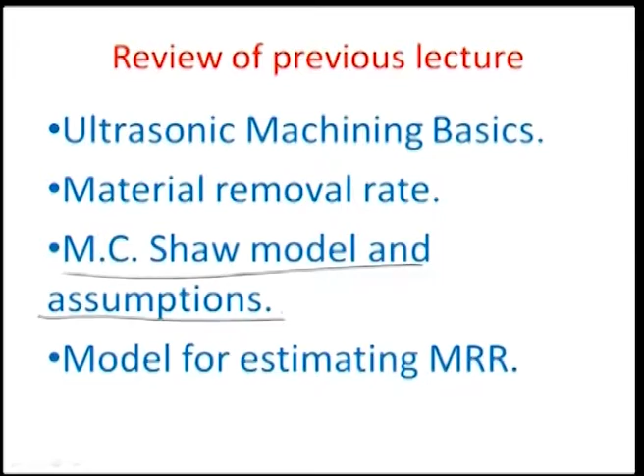For all practical purposes we should consider the amplitude of motion of the tool head to be constant, and so forth. So there was a set of assumptions we made for predicting the MRR, or material removal rate, and then we started modeling to estimate what this MRR value would be.

In the process of doing that, we arrived at a formulation given in this slide, where we talked about the ultimate yield stress of the workpiece material, sigma W, and correlated this to the average force that the vibrating tool head gives on the grains, the amplitude of motion of the tool A, and the number of grains or particles making impact per cycle, Z. D here was the grain diameter of the abrasive grains.

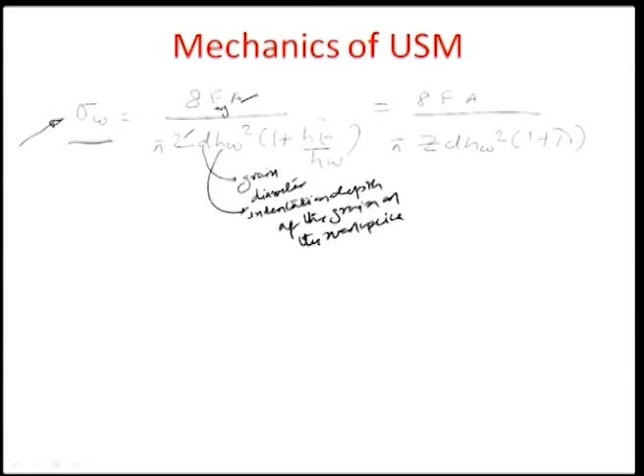HW was the indentation depth of the grain on the workpiece, and this parameter known as lambda was basically the ratio of the ultimate flow stresses of the workpiece and the tool. As we have seen before in detail, the ultimate yield stress is inversely proportional to the indentation depth. So we can assume that sigma W by sigma T, the ultimate yield stress of workpiece to tool, is nothing but the inverse ratio of the depth of indentation of the tool to the workpiece, and this we considered as lambda, which comes into this equation.

Therefore we have ways and means to predict the ultimate yield or flow stress of the workpiece material. So that is how we have a well defined relation between the various parameters associated with the force given by the vibrating tool head to the area of the grain interfacing with the surface, and the ultimate flow stress of the work material sigma W in question.

Now if we try to see what the Z value is, the grains per impact, the number of grains in contact between the workpiece and the tool in one impact, let us assume that the number of grains acting is inversely proportional to the square of diameter of each grain, which is obvious because supposing there is an area with many grains on it, and the average diameter of each grain is given by D as predicted before.

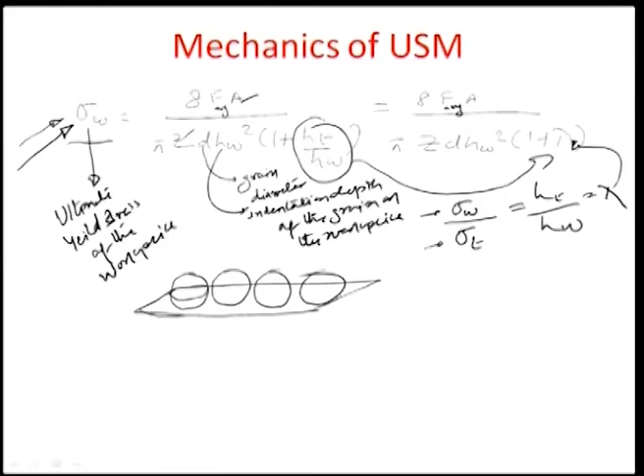So this diameter here is D. The amount of occupation of the grain area would definitely be a function of the overall area coming between the tool and the workpiece. This is the tool, the vibrating tool head, coming down, and the grains are in between the tool and the workpiece. So the influence of the diameter of the grain on the effective area of the workpiece that can be machined, shown by this shaded region, is obvious.

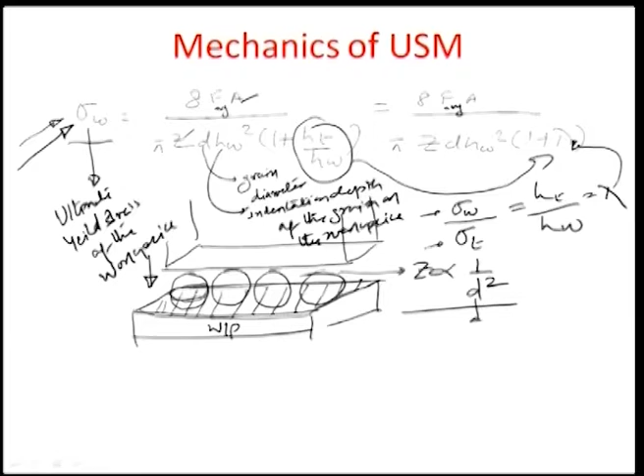So if we assume that the number of grains acting, let us say Z numbers, in one impact between the tool and the workpiece is inversely proportional to the square of the diameter of these grains, which signifies the area of projection of one grain, it will not be improper to assume this kind of relationship.

So, for a given area of the tool face, Z is actually inversely proportional to the square of the grain diameter, and also Z would be proportional to the concentration of the grains in the slurry. So, if C is the concentration term, more is the concentration, more would be the value of Z, the number of particles between the tool and the workpiece.

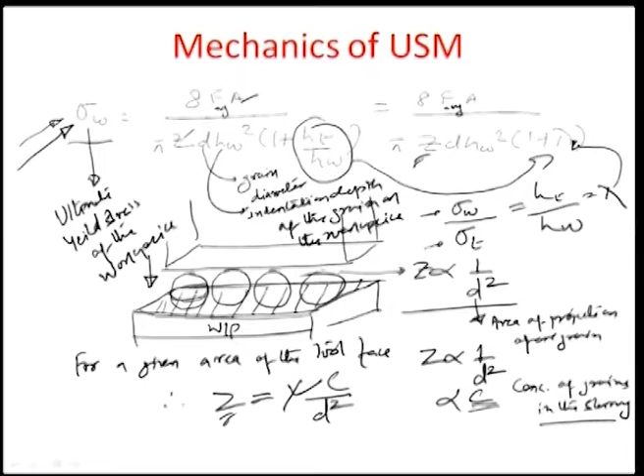So, therefore, we can say that Z is equal to some constant xi times C by d square, and we can substitute the value of Z from here into this equation. So, the final form of the equation comes out to be: square of HW is equal to 8 times average force times amplitude A times grain diameter, divided by pi times xi.

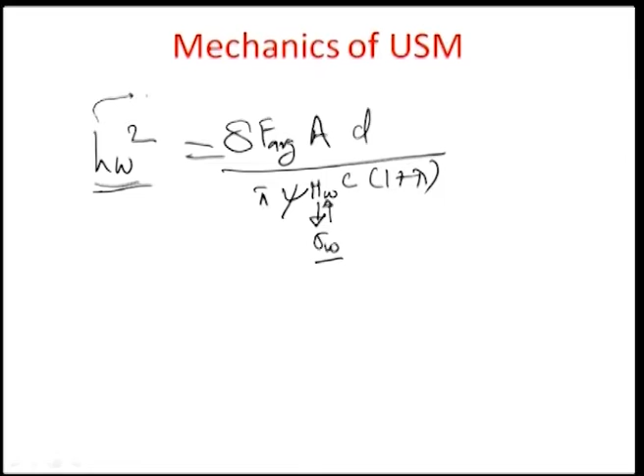And the flow stress of the material is nothing but the hardness of the material. So, sigma W and HW are kind of interconvertible. So, HW times C times 1 plus lambda, okay. And where this small HW, as you know, is the depth of indentation of the grain on the workpiece surface.

So, therefore, HW always becomes equal to the square root of 8 F average A d divided by pi xi HW C times 1 plus lambda, and if we substitute this value of HW in the equation for Q - you remember Q earlier was determined to be proportional to d, HW to the power of 3 by 2, times the value of Z times the frequency nu.

So Q here can become - of course we can substitute all these values here. So Q, finally after substitution of HW and the value of Z, which is inverse square of d times C times xi, and nu of course is the frequency, we get: Q is proportional to amplitude to the power of 3 by 4, diameter d to the power of 1 by 4, the average force of the vibrating tool head to the power of 3 by 4, times concentration to the power of 1 by 4, divided by the flow stress or hardness of the material HW to the power of 3 by 4, times nu.

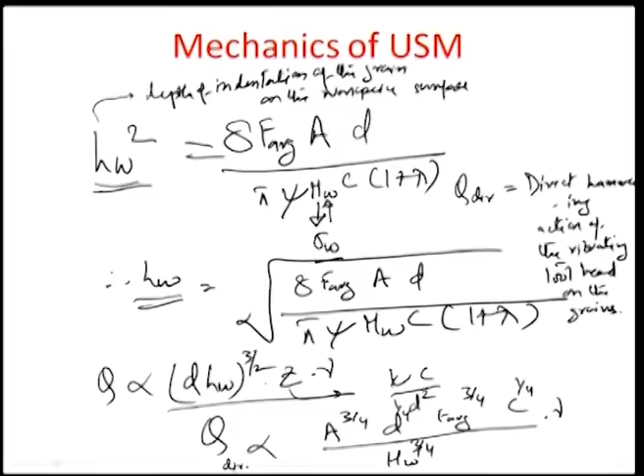As I told you, there are two modalities of this material removal. One is the direct hammering action of the vibrating tool head, and the other - which is not as significant but still needs to be considered and modeled - is the impact that a free grain would have on the surface. That means if the gap between the tool and the workpiece is very high, there is a possibility of the abrasive grain to freely flow between the tool head and the workpiece. So the impact that the tool would give on the abrasive grain would be converted into a sort of kinetic energy of the grain, and this kinetic energy would impinge on the surface, thereby removing material from the workpiece. So that is a separate mechanism.

So this Q that we have determined now is really the direct hammering action, where you are squeezing the grain between the tool head and the workpiece, giving an average force F average between the grain and the tool, which is creating a direct ploughing action. So that is what the first part is.

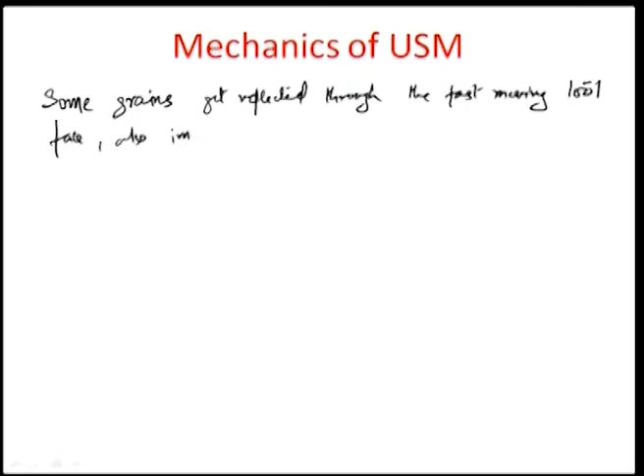Let us now look at the second part of the problem, related to the kinetic energy of the grains. Let us try to model that part. So some grains get reflected through the fast moving tool face, and also impinge on the workpiece.

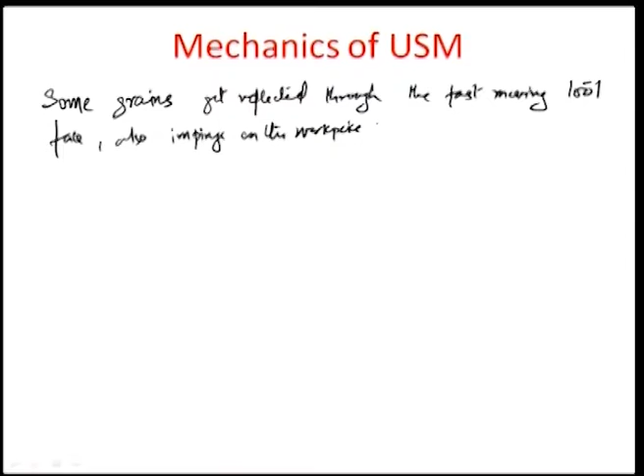So we can estimate the depth of indentation in that case by looking at the following. Let us say this is the tool, and this right here is a workpiece, and there is an abrasive grain, which because of the motion imparted by the slurry goes and strikes the tool in this particular direction, coming out of it in this direction, and we will have to somehow predict what is the maximum reflected velocity.

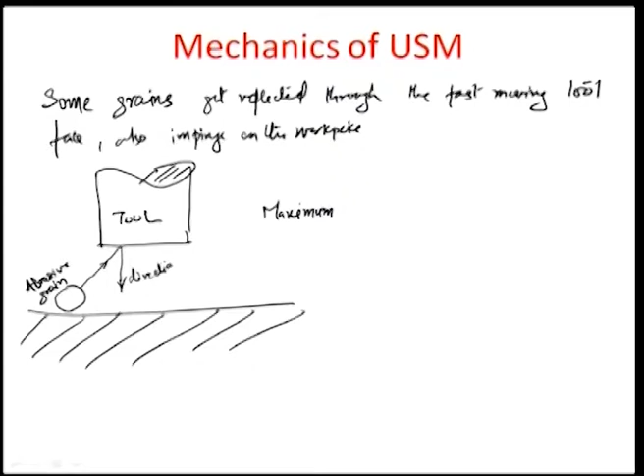So, this is the direction of reflection of the grain. So, the maximum reflected velocity needs to be somehow determined in this particular case.

Okay, so that is actually, let us say, y dot maximum. So, as we know, the grain velocity of the abrasive grain, the initial velocity by which it is striking the tool, is of hardly any significance in comparison to the overall inertial component of the tool, because the tool first of all is very heavy, and number two, it is also vibrating at a certain velocity.

At ultrasonic frequency, meaning thereby that its velocity is also very high. So, therefore, the initial velocity of the abrasive grain as it strikes the tool surface, for example in this position A here, is not really of great significance, and we can say that whatever is the velocity of the tool head

is at that particular point of collision, at the time of collision, would be equal to the velocity of reflection of the particle. Okay, so it is simply imparted, there is no specific inertial component associated with the abrasive grain because of its small nature. It is few microns, as I told you, abrasive grains could be in the range of 20 to 25 microns.

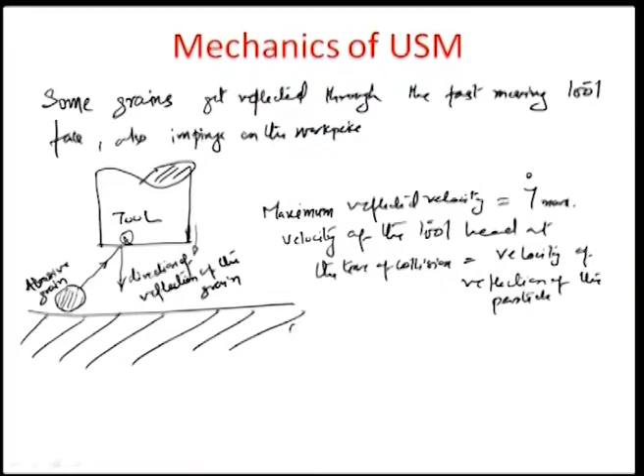So, let us find out first the operating velocity of the tool head as a function of time. So, y(t), as you know, because it is a sort of simple harmonic motion imparted by the tool.

So, y(t) can be written in the form of an equation as the amplitude of motion, a, times sine of 2 pi nu t. Okay, nu is the operating frequency of the tool, and a is the amplitude, and so that is what the equation of motion of the tool head would be.

So, the operating velocity of the tool head would be dependent on this equation of motion, and so operating velocity can be written down as y dot t, the first differential of y with respect to time, which is equal to a times 2 pi nu times cosine of 2 pi nu t.

And as you know, at time t equal to 0, which signifies probably the mean position of the tool, the velocity is supposed to be the maximum. So this value y dot t would be y dot maximum, which is actually equal to a times 2 pi nu. A is the amplitude of motion, nu is the operating frequency, and so a times 2 pi nu is basically the y dot max, or the velocity of motion.

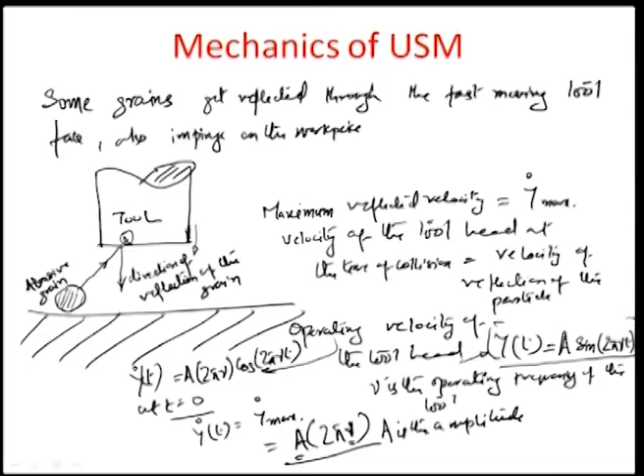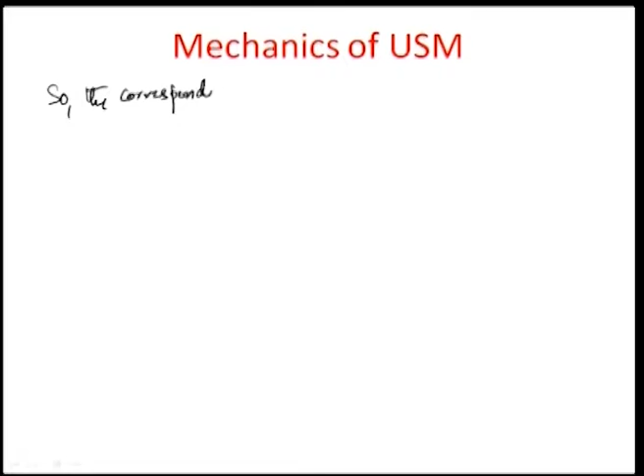So now we look into the aspect of the kinetic energy of the grain once the maximum velocity of the grain is there. So the corresponding KE, or kinetic energy,

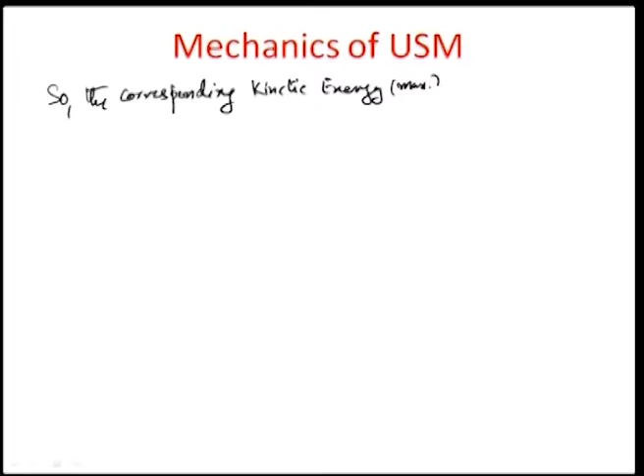actually will be equal to the maximum kinetic energy, because it is half mv square. V is the velocity of motion, and v is equal to v max, corresponding to the maximum velocity, the time when the tool is at the mean position.

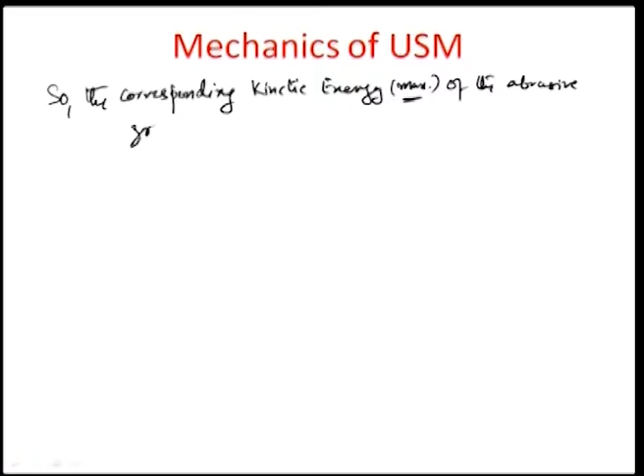So therefore, the maximum kinetic energy of the abrasive grain, I already explained to you before, is really nothing but due to the maximum velocity of the tool. The inertial component of its own self, of the grain, is so small that we do not really treat that in this equation, and so therefore the maximum kinetic energy of the abrasive grain is given by the term half mv square.

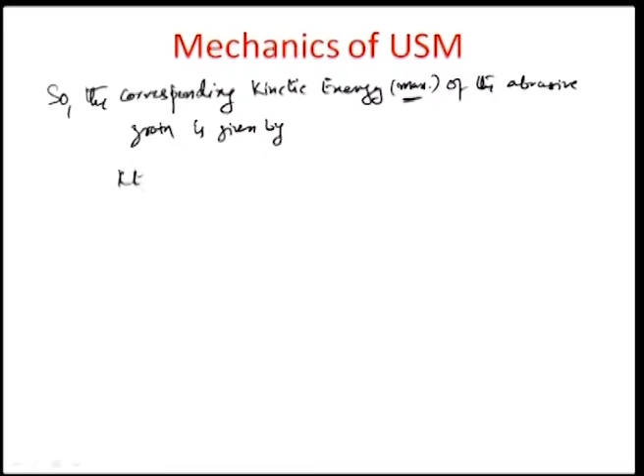And m here, because it is a spherical grain that we are assuming with diameter d, we can assume it equal to the volume of the grain, which is 4 by 3 pi r cube, or d by 2 whole cube, times the grain average density rho a. So this is actually the density of the abrasive material.

This is not really the number of grains per unit volume, but it is the density of one grain per unit volume of that material. So that basically is the mass component in the motion.

So it is half mv square, and v, as you know, is 2 pi nu a squared, where nu is basically the frequency, a is the amplitude of motion of the tool head, and this is a characteristic property of the grain itself. So if we really try to solve this around, we get the term 1 by 3, cube of pi, rho a d cube nu square a square, where rho a is the density of the abrasive grain.

So, that is what the maximum kinetic energy in this particular case would be.

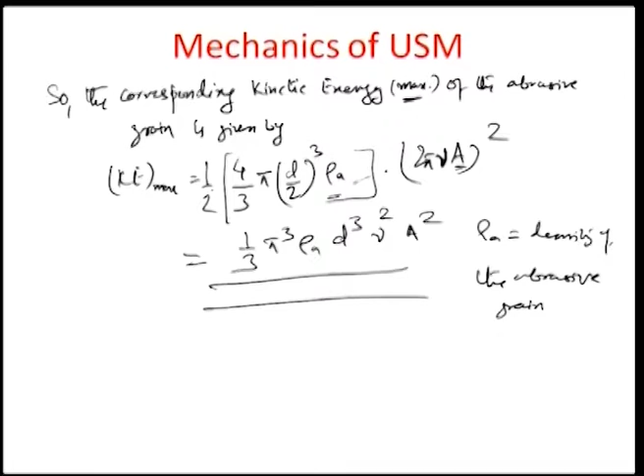Basically, now we want to find out the amount of energy which is needed for the indentation caused on the surface by a free flying abrasive grain that comes and strikes onto the tool surface and impinges onto the workpiece surface as a result of the reflected velocity.

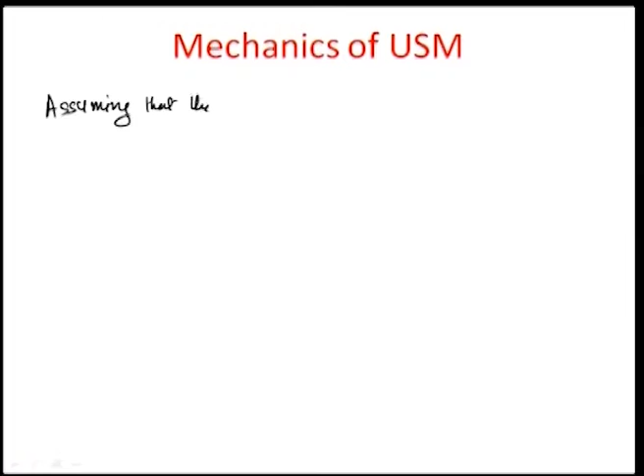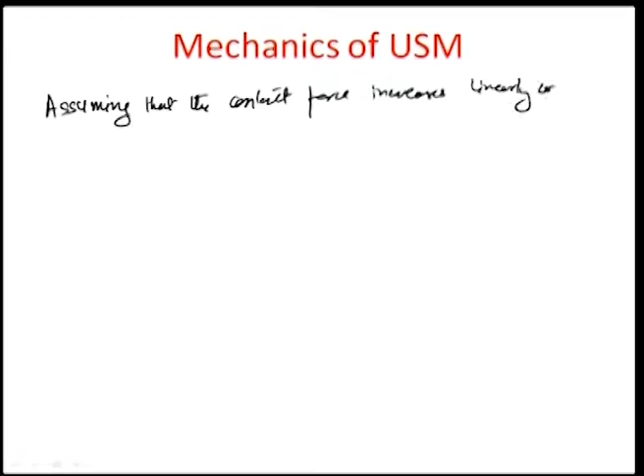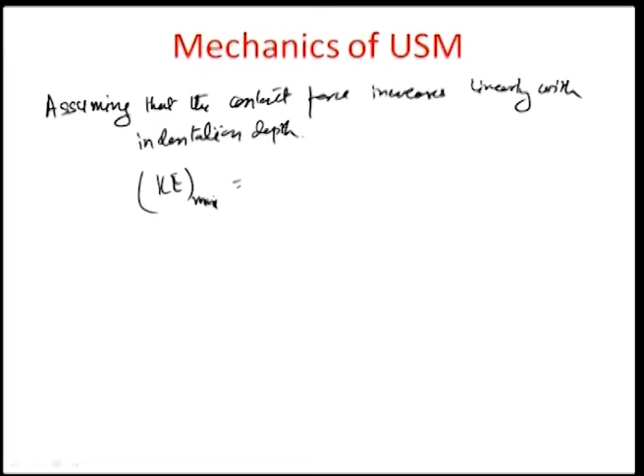Assuming that during the indentation caused by such an impinging grain, the contact force increases linearly with the indentation depth, the Ke max which has been imparted onto the grain surface, or the free flying abrasive grain, by the tool surface should really be equal to half Fi dash max Hw dash.

So this is the linearly varying model, meaning that the force is 0 at the beginning when the grain has not yet struck the surface, and then the force slowly increases because the grain gives all its momentum, all its energy, to the surface, and also faces the reverse force from the surface.

And then after a while, after the full indentation has been realized, the amount of force at that point can be treated as Fi dash maximum. Then you can assume that the grain slowly releases contact, meaning it flies off the workpiece surface and the force goes all the way back to 0.

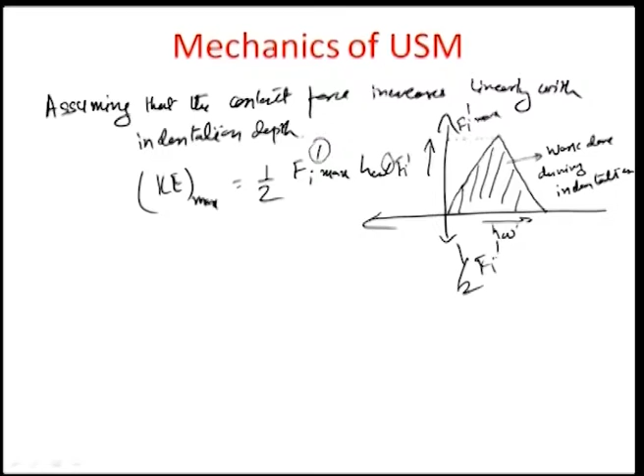So the area under this curve, shown by the shaded area, is really the work done — the amount of work done because of which the indentation has happened. During indentation, this area is given by half Fi dash maximum Hw dash, and we equate that to the maximum kinetic energy of the grain obtained earlier.

So therefore we can easily find out sigma W, which is actually equal to the hardness of the workpiece. These are all flow stresses, and it is related to the maximum force at that instant when the indentation had gone maximum — that is, Fi dash max per unit area.

At that time, if we assume that the total grain diameter projected onto the workpiece surface is capital D, and capital D is, as you already know, twice root of d Hw, where Hw is this depth of indentation — recall the first exercise on USM where we modeled how a grain with diameter d impacting a surface produces a depth Hw. There was a relationship between this capital D, the projected diameter of the grain on the surface, and the grain diameter.

So therefore, the force per unit area from this equation, where F goes to Fi dash max — the maximum force of the grain on the surface — per unit area at that time, which we assume to be pi capital D square by 4.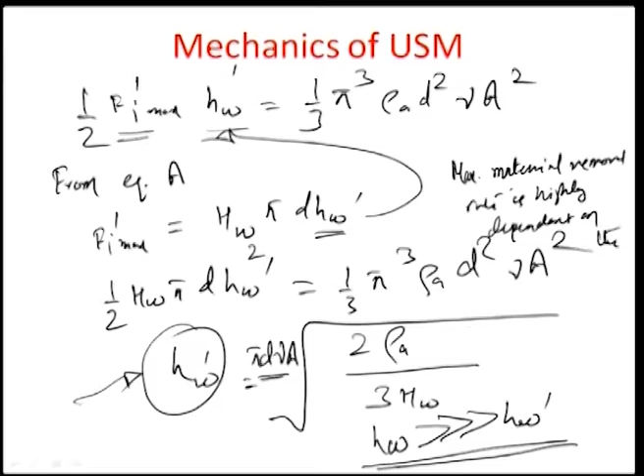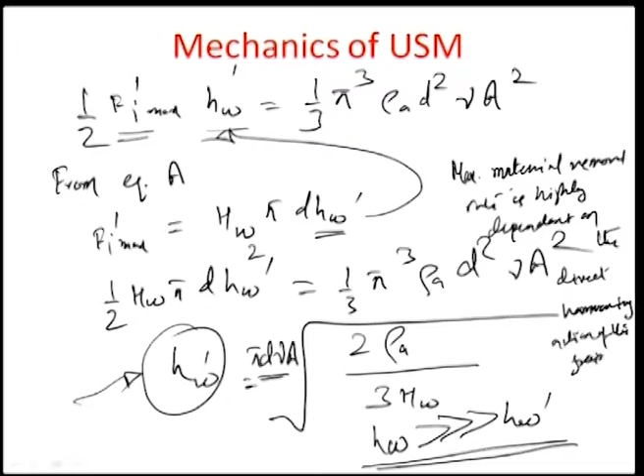So the maximum material removal rate is highly dependent on the free flowing versus the direct hammering action of the grain. It is dependent on the direct hammering action of the grain. So it can be concluded that most of the material is really removed by direct hammering, and very little material comes out because of the free flowing impact, which is not relevant to mention here.

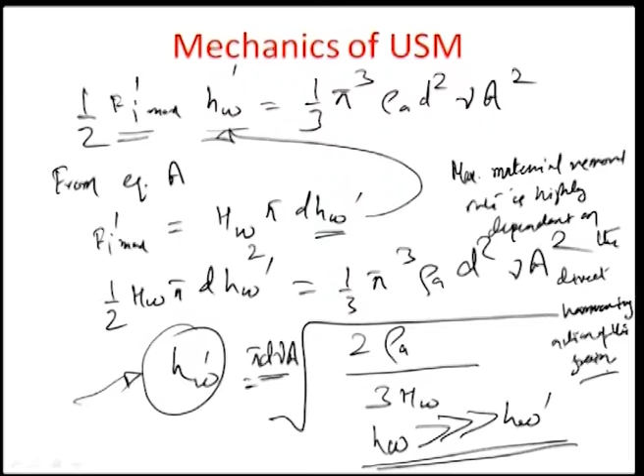From the earlier relationship we have seen that MRR is proportional to A to the power 3 by 4, grain diameter small d to the power 1 by 4, average tool force to the power 3 by 4, times concentration to the power 1 by 4, divided by hardness of the workpiece to the power 3 by 4, times nu, where nu is the operating frequency, A is the amplitude, small d is the grain diameter, and HW is the hardness of the workpiece.

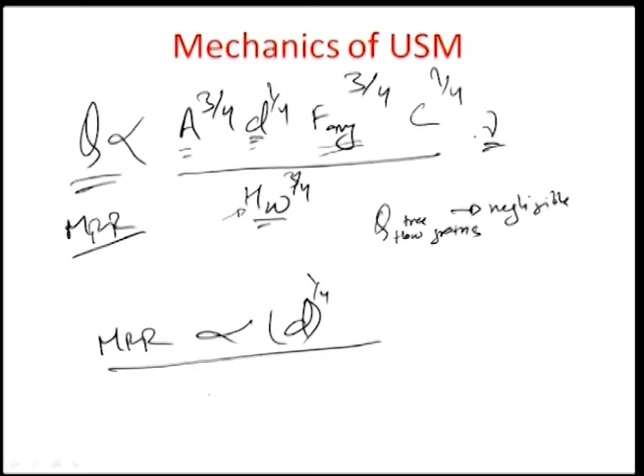As I discussed, the MRR because of free flowing grains is negligible. Therefore, this really is the MRR value, and it is safe to say that MRR is proportional to d to the power 1 by 4, where d is the grain diameter. Unfortunately, that is not so, because in experiments it has been observed that the material removal rate is proportional to the first power of d, not d to the power 1 by 4. So this was a discrepancy that arose from Shaw's model.

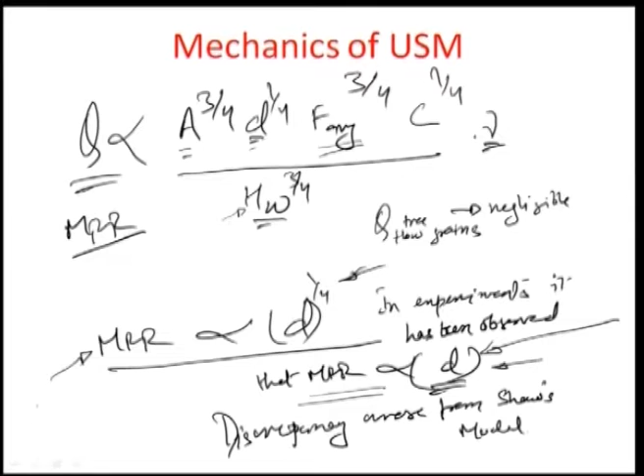Because of this, some explanation needed to be given so that this experimental data, proportional to d, could be fit into the data theoretically derived by Shaw's model. So Shaw actually tried to find out what really goes on in reality. This discrepancy was addressed by Shaw finally by looking at the overall shape of the grain.

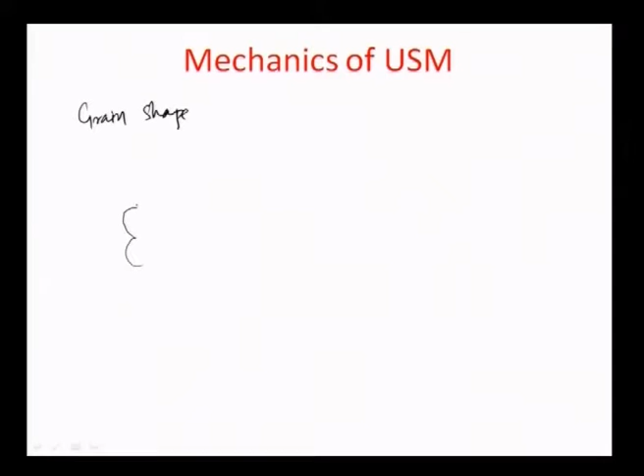Shaw looked at the grain shape under a microscope and found that the grain is not actually a spherical grain, but a sort of flowery structure on the surface, something like this. And what really was impacting the workpiece surface was not this overall average spherical grain diameter small d, as has been illustrated many times in the model, but this smaller diameter here, of one such spherule, d1. Essentially this is the diameter which would affect the material removal process and indent on the surface. The surface area also would be determined by d1, not d.

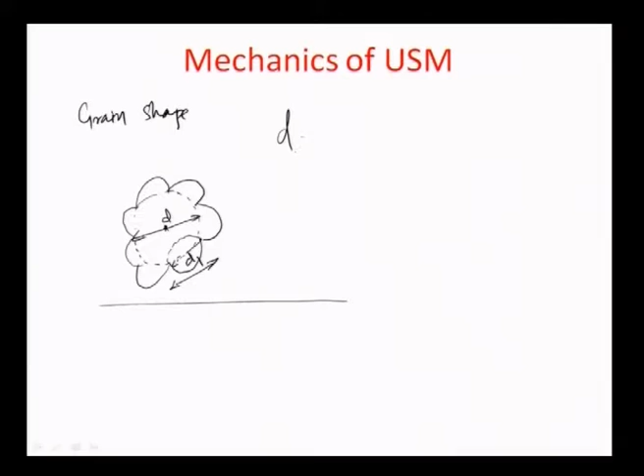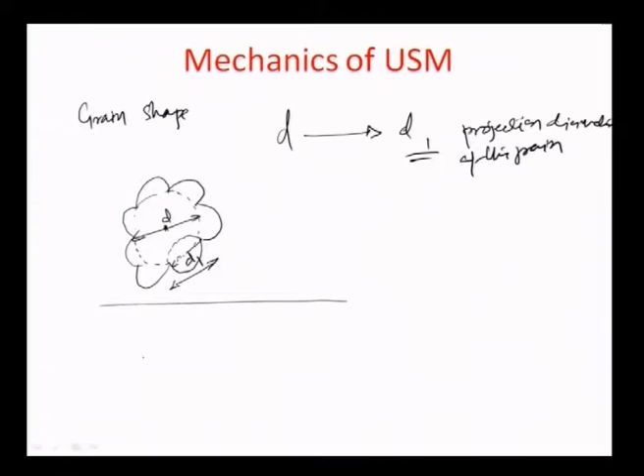So he closely monitored if there exists a correlation between the grain diameter d and this projection diameter of the grain, d1. What he interestingly found is that yes, there exists a correlation where these two can be very well correlated, as d1, the projection diameter, being proportional to the square of the average grain diameter small d — meaning that if this diameter increases, d1 almost increases as a square of this diameter.

Therefore, it is safe to assume that d1 is actually equal to a constant mu times square of d, and this mu can vary between close to 1 or somewhere less than 1, and that way you can have a very nice formulation between d1 and square of d.

So let us call this equation b in the theory of Q, and Q you already know is proportional to this, now it is d1 hw to the power of 3 by 2 times z times nu. Remember, this is the volume of material removal.

This d1 hw to the power of 3 by 2 is now indicative of the new projection grain diameter, which is actually the diameter causing the indent or impact on the surface, times the depth of indentation hw, which remains almost the same, to the power of 3 by 2.

This is correlated by the formulation square of d is actually equal to 4 times d1 hw. So we are taking the modified diameter of this projection, which is causing the indentation, and trying to find a relationship between this diameter and the overall grain diameter d. So if you put this expression d1 into this particular expression here, you get that of course hw...

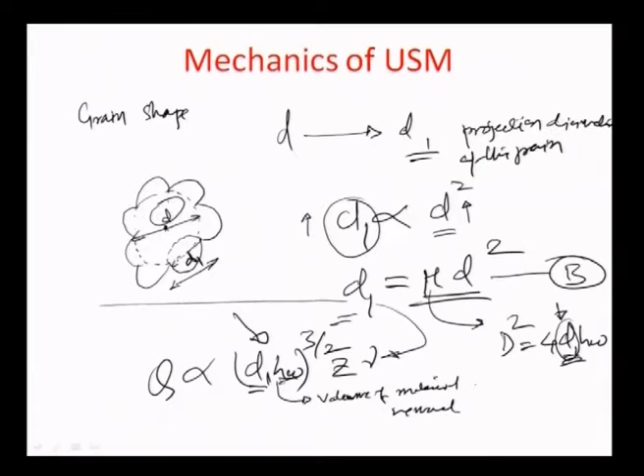As I already told you, for a hammering grain case, hw can be correlated by this relationship: 8 f average times amplitude A divided by pi z d1 hw, 1 plus lambda. And we already know that z is proportional to the concentration and inversely proportional to the square of the grain diameter.

So if we put all these together in the equation for Q, the Q equation becomes equal to cube of d times hw to the power of 3 by 2 times psi c by d square nu.

One thing which is interesting to observe here is that the z value is still dependent on the average grain diameter value. For obvious reasons, the number of particles making impact on the surface between a fixed tool area and a fixed working surface is determined by the area of projection of an average overall grain, and that area is proportional to the square of the average diameter of the grain, not the diameter of the projection.

Projections can be many on a grain surface. So that is why the z value does not alter, it is still inversely proportional to the square of the diameter, because that is ultimately the determinant of the grain to grain spacing. The average diameter of the grain is the determinant of the grain to grain spacing between the tool surface and the workpiece surface, assuming a fixed tool area.

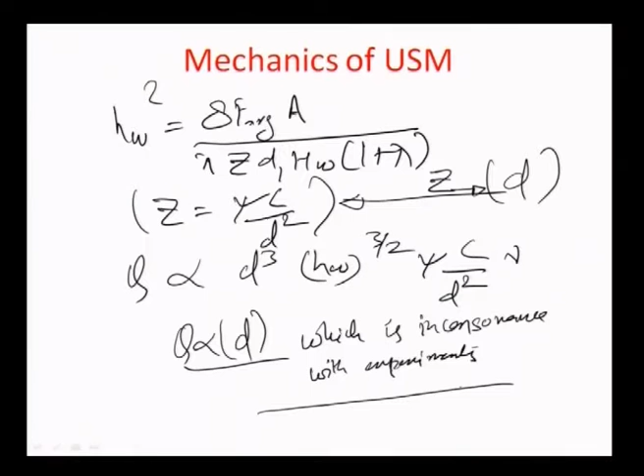So what I am now trying to do is basically evaluate some of the typical characteristics of how Q will vary with what parameter. Let us actually write this whole thing down here.

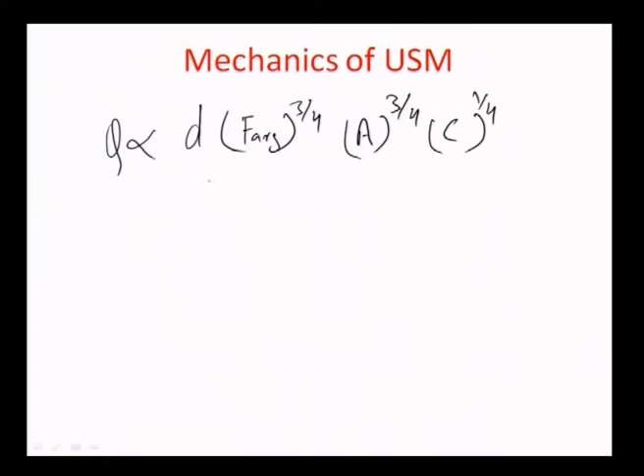So Q, as you know now, is proportional to d times the average force F average to the power of 3 by 4, times amplitude of motion of the tool to the power of 3 by 4, times concentration C to the power of 1 by 4, divided by the hardness to the power of 3 by 4, 1 plus lambda to the power of 3 by 4, times nu, where nu is the average frequency.

Thus, Q would increase if the grain diameter increases, obviously because there is a direct proportionality between the two. And if all these other parameters like average force, amplitude of motion, concentration of grain, and average frequency increase, they would significantly impact Q, so Q increases because of them. And if the hardness of the workpiece is more, then Q falls down, so Q is inversely proportional to it, and also so is true about the hardness ratio.

And hardness ratio, as you have earlier defined, is well defined as the relationship between what the workpiece hardness or flow stress is with respect to the tool hardness or stress.

If the workpiece hardness is more, it is obvious that the material removal rate Q would fall down. That is in a nutshell what the predictions of Shaw theory actually show, and experimentally these trends have been verified many times by various people. So we would now like to look at some experimental trends of different aspects of Shaw theory.

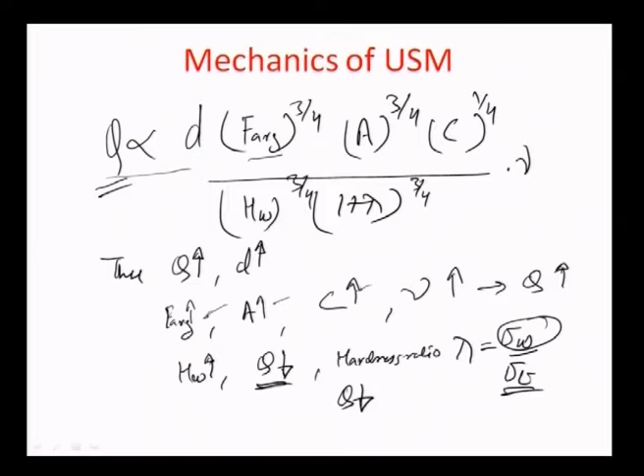We'll see how theoretically predicted values differ above a certain limit of one parameter. One case is the MRR plot with respect to the feed force, or the average force F average. It is obvious to assume that if F average is more, then Q is more. Theoretically predicted trends would look like this dotted line, as if F average keeps increasing, Q should increase.

But what is interesting is that above a certain limit of the feed force, there is a depreciation of the material removal rate, and it comes down after a certain critical feed force. This happens because of a very important effect which practically almost always happens in these USM systems, known as the grain crushing effect.

If the feed force is raised to a value such that the F average per unit area of the grain equals the ultimate flow stress of the abrasive grain itself, there is a possibility that the grain itself would get broken into pieces, causing a crushing effect. So the number of active grains available at that critical feed force would go down.

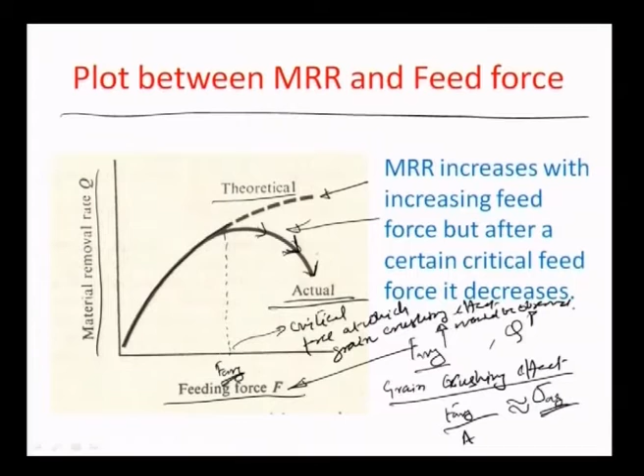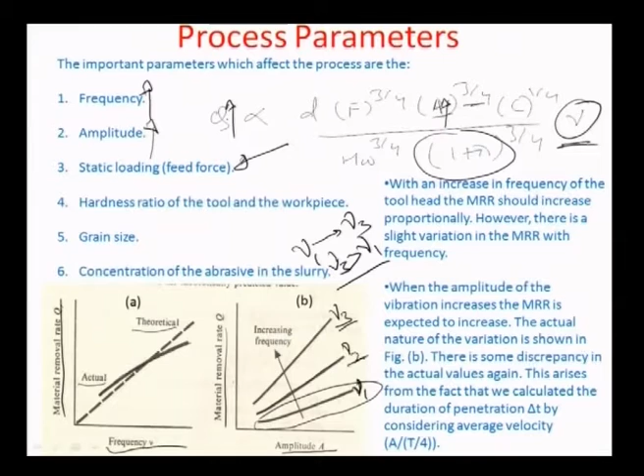Also important is that if the lambda value, that is the work hardness to tool hardness ratio as I illustrated before, is increased, there is a reduction in the material removal rate, which comes from this equation: 1 plus lambda to the power of 3 by 4 is inversely proportional to the mean material removal rate Q. So it is good to assume that if lambda increases, the material removal rate would fall down.

These are some relative material removal rates for a frequency of about 16.3 kilohertz of the vibrating tool head, an amplitude of 12.5 micrometers, and a grain size of 100 mesh. For different work materials like more brittle materials, such as glass, the material removal rate is very high, which effectively means the work hardness by tool hardness ratio is lower in that case. If the material is more ductile in nature, going to a higher scale, you can see the MRR reducing as the material changes.

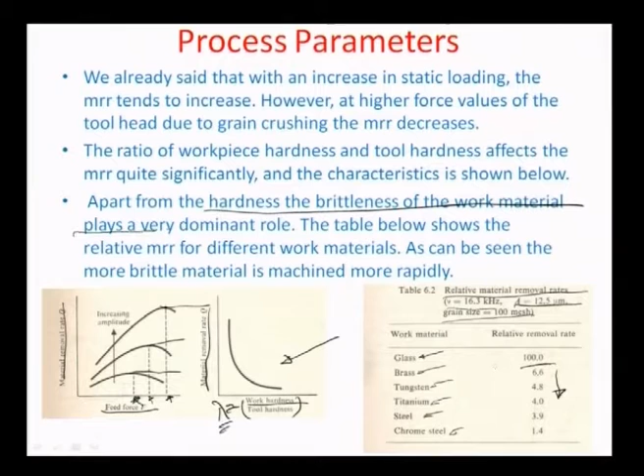So the hardness and brittleness of the work material both play a very dominant role in this process, and particularly in MEMS or microsystems applications, when we talk about silicon micromachining or glass micromachining, they are very brittle in nature. The paradigm is really very high material removal rate, which has to be well controlled so you can actually have a small channel imprinted through a masking technology, which I will probably show at the end of this fundamental process analysis of the mechanical kind. That is how these processes would be applied to fabrication of microsystems technology.

There are certain other aspects I would like to point out. For example, regarding the variation of material removal rate with the mean grain diameter, it is obvious to assume that as the grain diameter increases, the material removal rate theoretically should proportionally increase, since Q is proportional to the mean grain diameter D. But again the important aspect of grain crushing comes here, because if the grain diameter is too high, there is a tendency of the tool to start crushing the grains. The moment this crushing phenomenon happens, the MRR goes down. So the actual value of MRR for a grain diameter greater than a critical diameter D1 would not follow the theoretical trend, it would actually start coming down.

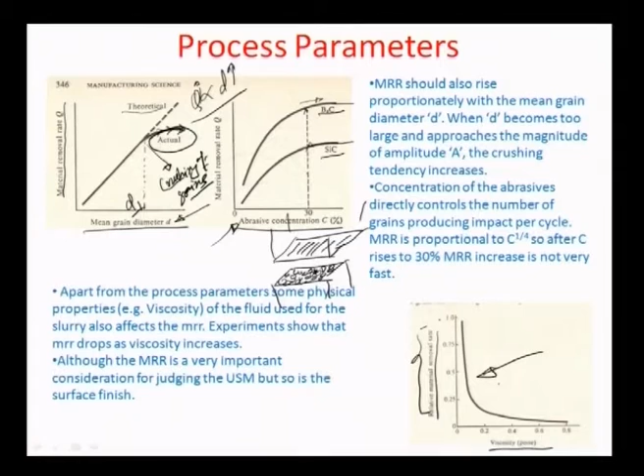Very important to know that if the viscosity is higher, the removal of material debris happens at a lower rate. So that is, in a nutshell, what some of the operating trends would be.

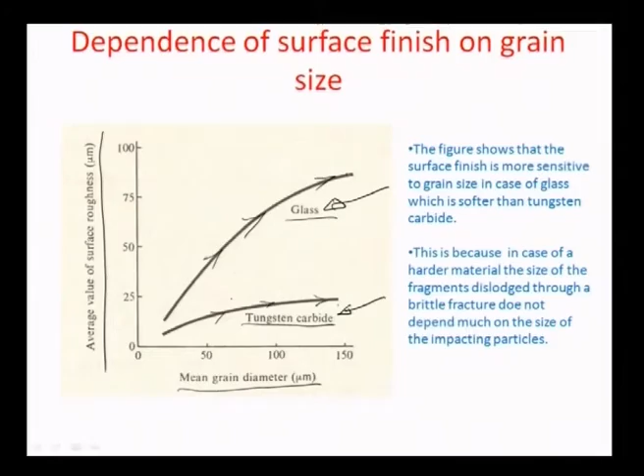Another interesting factor is what happens for a brittle versus a harder material. For example, you can compare two such materials of average surface roughness values in microns, between tungsten carbide and glass. With the mean grain diameter increased, there would be a critical grain diameter beyond which grain crushing takes place. But what's important here is that if the surface is more brittle, the resulting surface roughness would be higher compared to a harder material, for obvious reasons: a brittle material is more amenable to brittle fracture, and greater chunks of material come out, forming larger craters, and because of these larger craters the overall average roughness of the surface would be higher.

So these are some of the dependencies of the various parameters associated with the USM process. What I would like to do next, since we are at the end of the lecture, is design some USM problems and predictively ascertain what the material removal rate would be from such a design.

In the next class, using the theory we've learned from M.C. Shaw's model of material removal, where direct impact or hammering dominates over free flowing grains in removing material, we will design some problems to estimate the material removal rate. This gives a ballpark idea of the rates involved, and in terms of specific energy needed through this process, I will compare it with other comparable processes. Once we finish designing, we will look at the important aspect of tool design, and finally apply these to microsystems fabrication technology. Thank you.